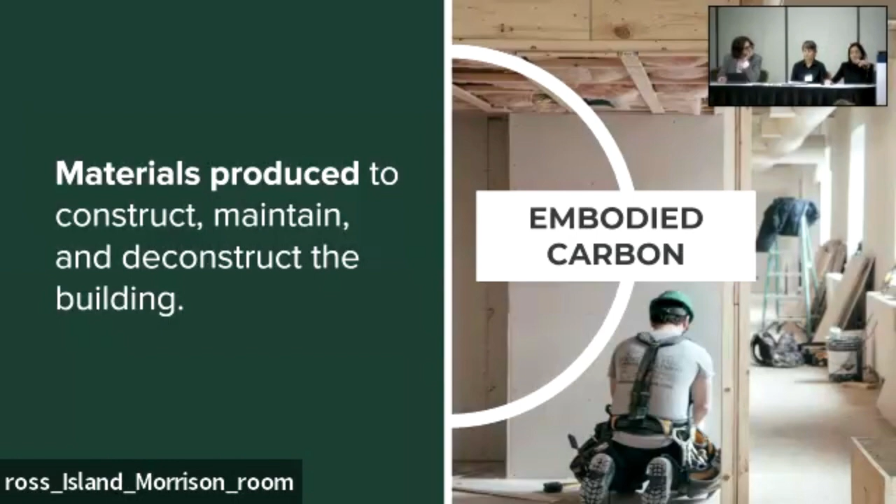Now, operational carbon is a very significant part of a building's footprint, but as I mentioned, the building industry has made some really incredible advances as it relates to things like energy efficiency and renewables. And as our buildings get more and more efficient over time, we're gonna start to see a shift where embodied carbon really becomes more and more critical. And so we really need to start thinking about this holistically and start taking into account the whole life carbon of our buildings.

So how do we do it? Up until this point, I've talked about what decarbonization is and why we need to do it, but really the essence of this session is how do we get there? So Rita, Nate, and I are going to present different frameworks for this, and I'm going to begin with a couple of frameworks for how to engage with decarbonization offered by the International Living Future Institute. And so we have zero energy and zero carbon certification that we manage, and both of these can be seen as a bit of a North Star in the green building industry for creating a decarbonized building.

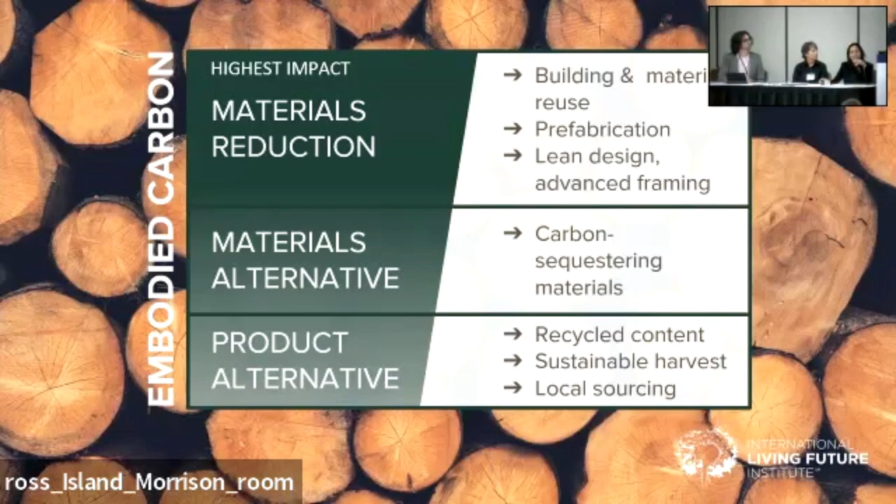I'm gonna skip over these few slides for the sake of time, but just wanted to share some of the zero energy certified programs that we've worked with. We have some in Washington, Austin. We have some single family homes in Moab, Utah that achieve zero energy. We have a really helpful financial case study up on our website for a project in Washington that's higher density affordable housing that pursued some of these goals. And we also have a couple of projects in our current affordable housing cohort that are actively pursuing zero carbon.

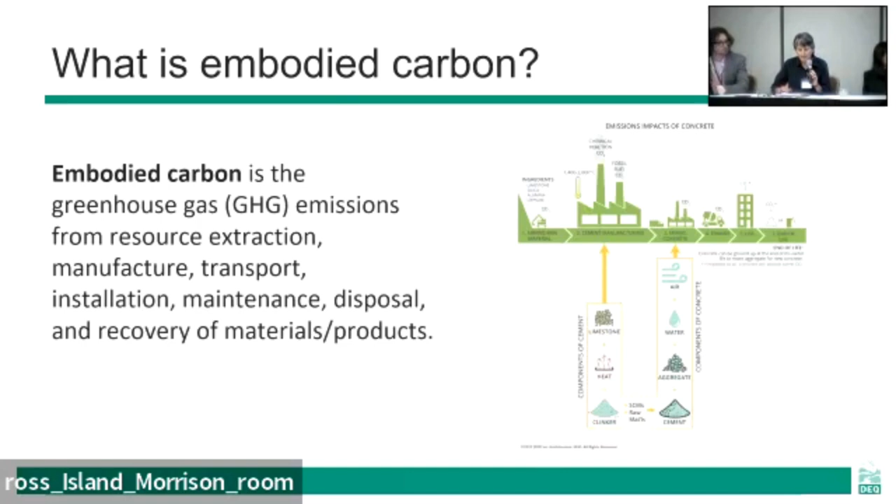When we take a life cycle perspective and think about not just cement, but all the materials that we use, again, the vast lion's share of those impacts are upstream in the manufacturing and to some extent the construction. So that's why we are focused heading upstream to reduce those impacts.

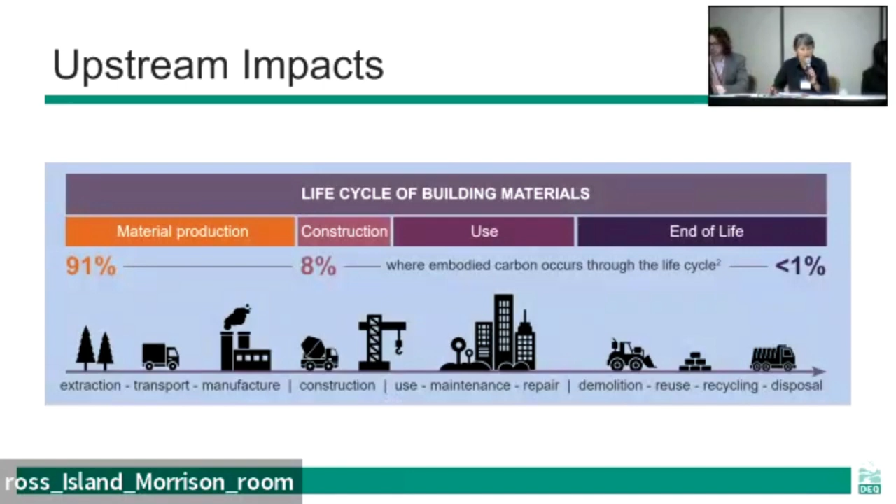When we think about the life cycle of a building, and we think about at what points and stages in the life of a building, what are those carbon impacts? What are those operational carbon impacts and the embodied carbon impacts? As Leah noted, right up front, we have a huge embodied carbon impact. Before we cut the ribbon for the grand opening, before anyone moves in, there is a huge embodied carbon impact.

We as an industry, as Leah noted, we've made tremendous strides in reducing the operational carbon, and a lot of that is due in part to codes getting more and more stringent. Over the last 50 years, a code built building generally has had the operational energy load knocked down by one half. It's really significant. When we pay attention, we can make some significant differences. Given our climate crisis and our understanding of materials, it's time for us to put more attention on the embodied carbon of our materials.

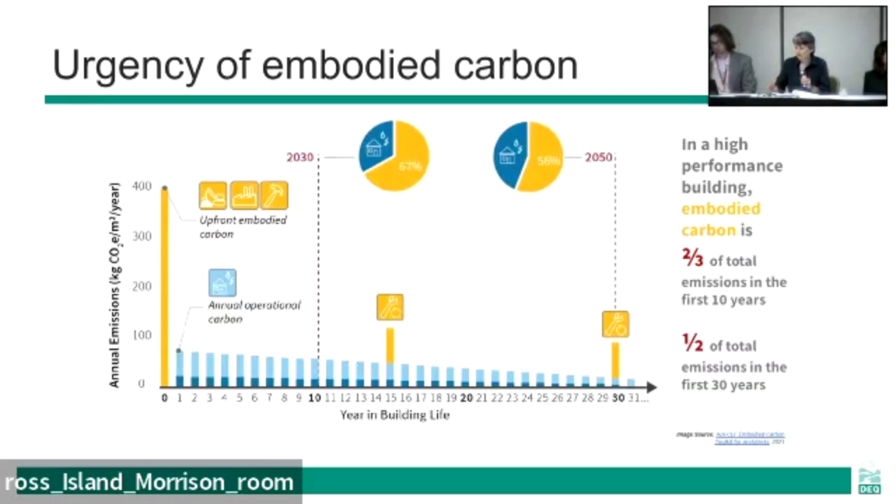So how do we measure embodied carbon? Well, we could geek out really, really fast here, but think of it as a super rigorous accounting methodology that looks at all the inputs, all the outputs, and the impacts. And this is a very standardized methodology that's based on a number of ISO standards.

The output or the reporting that comes out of a life cycle assessment, and believe me, you don't want to read the 150-page report, but you might want to take a look at the 5-page environmental product declaration. You'll often hear the term, just the code, EPDs. You'll hear EPDs all the time. Think of an EPD as kind of analogous to a nutritional label for food.

So if we have EPDs for our building products, we can compare the global warming potential of those products, or embodied carbon. Global warming potential and embodied carbon often are used interchangeably. So if we have labels for products, we can compare the embodied carbon of comparable products similarly to how we can compare the caloric impact of food that we're considering. So EPDs are an important part of the puzzle here in demystifying what we're using and how to make better choices.

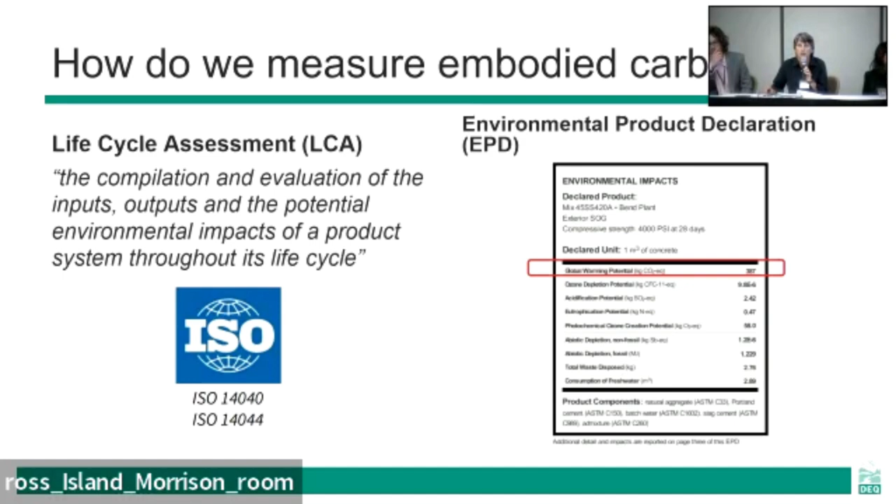So what are we doing about it? And how can we reduce the embodied carbon impact of the materials that we're using? Well, one thing is to make environmental product declarations for the products that we use more readily available.

This summer, Oregon DEQ, in partnership with the state of Washington and folks from the International Code Council, we were successful at securing a $3.5 million grant from US EPA to support manufacturers of building products serving Oregon and Washington so that they can produce EPDs, so they and we can better understand the impact of their materials. So we anticipate we'll be working with more than 200 manufacturers over the next 3 years, and anticipate that that'll result in at least 1,000 additional EPDs, again, to help inform our choices.

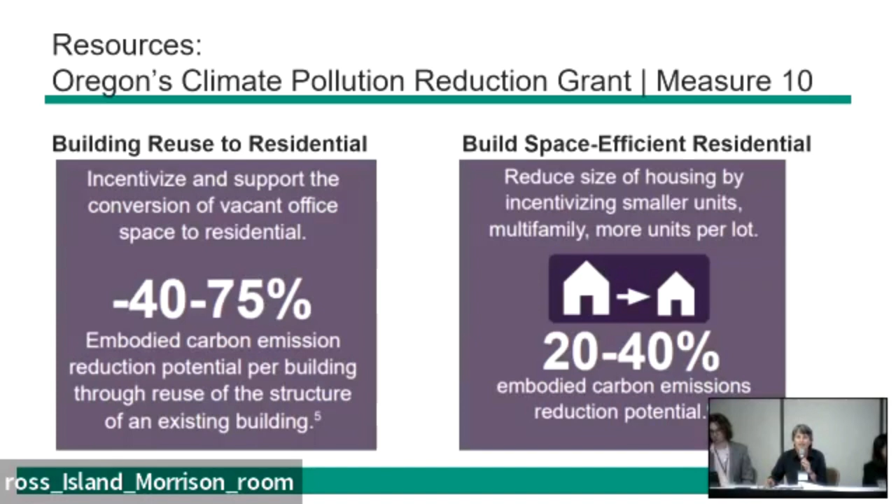Both of these strategies inherently are low carbon strategies because we're using less materials. And then space efficient housing offers that added benefit, as Leah mentioned. The smaller structures are going to take less energy to operate, heat, cool, ventilate. And another really interesting thing is if we have smaller spaces, people tend to buy less junk and fill up those spaces. And that's another piece of our climate puzzle, but that's a whole different topic.

And we also see great upside in terms of us being able to educate and inform a lot of project teams about what is embodied carbon, share resources, and do some interesting analyses and really understand the carbon impact and what else we could be doing going forward. Another piece of the grant is that we're requiring that funded projects demonstrate at least a 10% embodied carbon reduction in the materials that they use to build out those housing units.

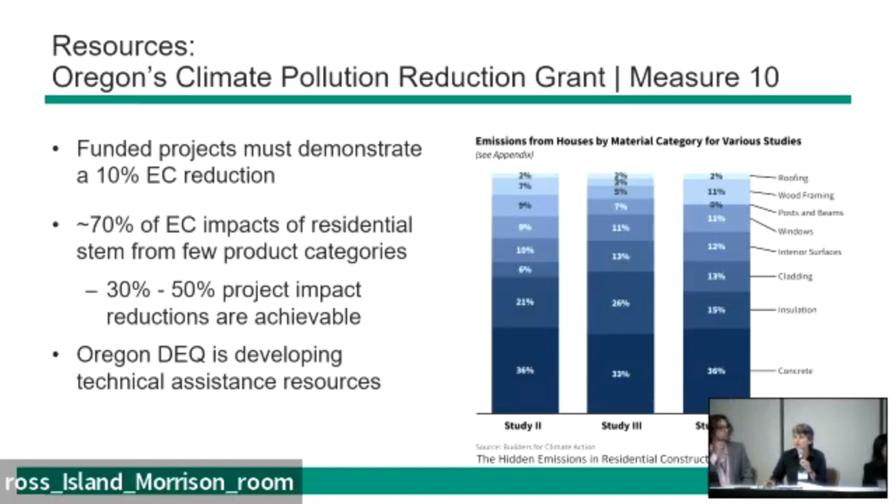sheetrock, and flooring. So Oregon DEQ is in the process now, and we're probably going to hire an outside contractor to help us with this, to put together a technical support package to support all these funded projects as well as everybody else. So that's in the works. Oops.

I'd like to call out just a couple of resources that you might find helpful if you're excited and interested to dive into embodied carbon. Your first stop should be the Carbon Leadership Forum. They are just providing top-notch, best-in-class research, resources, references, and trainings, and they're all free. So they are absolutely just an incredible resource.

I'd also like to note Architecture 2030. They've put together some really helpful and compelling and interesting resources to help us all better understand embodied carbon and where are those impacts, where do they take place, and what are they associated with in the building materials that we use on a regular basis. And as I noted, DEQ is in the process of putting together technical resources, which should be available by the middle of next year, maybe a little bit sooner.

Oregon DEQ is in good company as it pertains to embodied carbon initiatives and policies. The state of Oregon, state of Washington, state of California all have a number of embodied carbon initiatives that are at the state level as well as the local level. I do want to just call out one of these items in particular, the fourth one, Oregon Building Codes is currently in the process of exploring the possibility of including embodied carbon within building codes, as well as taking maybe a non-code perspective. They're considering both.

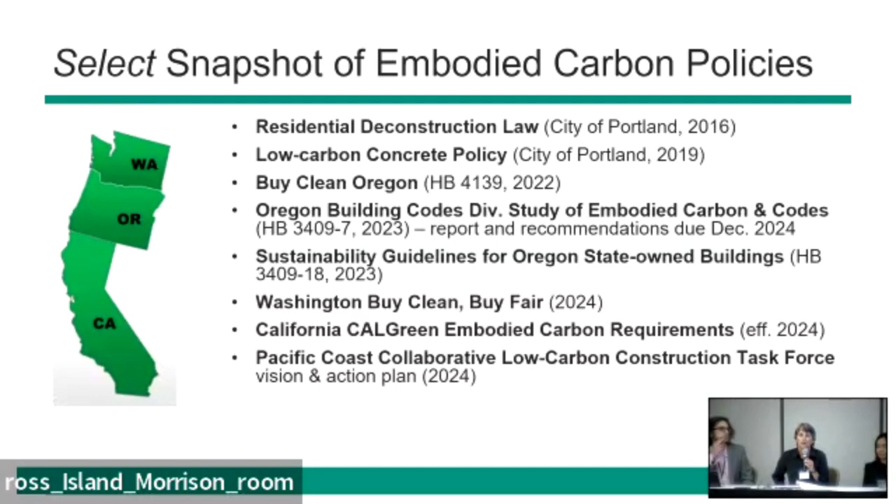They owe a report and recommendations to the Oregon State Legislature by the end of this year. We're really excited to see it. We've been collaborating with them, but it's their report, so they own it. We're nudging them, but we're excited to see what they produce and their recommendations, because we think that's going to set the stage for a lot of our work, our collective work, the big we, to come.

And just in closing, I'd just like to reiterate that embodied carbon is a big piece of our climate action puzzle. There's a lot of resources currently available that can be applied, carbon neutral. Some are even offering cost neutral. Some even offer cost savings. And I think those are just going to continue to grow as we all become more familiar and build our practice of addressing embodied carbon. Super important issue of our time.

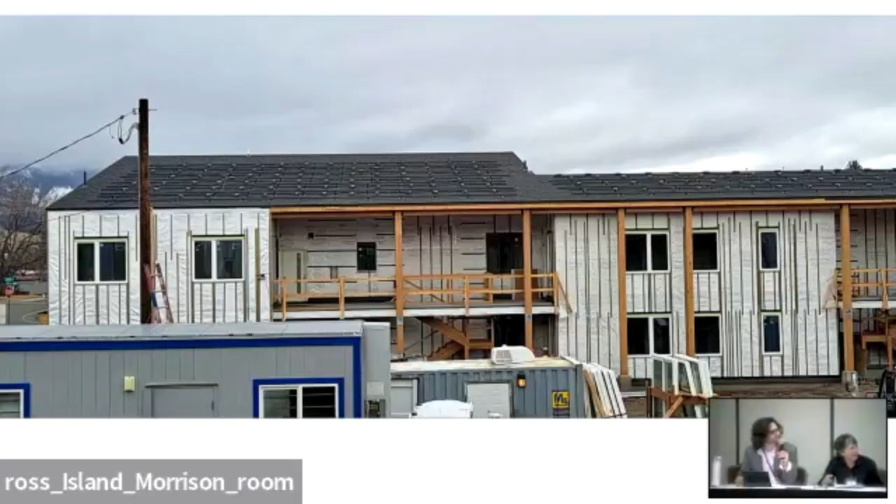So now your cheapest and most, yes, please. I'm terrible at clicking, apparently. So step one. Thank you. Thank you, Rita.

So, the lowest cost, highest impact is to maximize solar first. And especially because this is a project that had a lot of roof area, because it's 2 to 3 stories. We just said, okay, let's orient all of our roofs and just maximize that, because there's solar energy tax credits. The folks we partnered with at Fleet Development did a fantastic job of helping the project take advantage of those. A lot of projects in Oregon are in ETO territory, who has a lot of incentives, which is great.

This project was not, so we didn't have direct utility incentives, so we had to get extra creative. It was an independent co-op utility, so they didn't have some of the grants that you can get through PGE or Pacific Power. So we had to leverage a lot of things, and that's what it takes, is finding all of the different avenues that you can try to leverage.

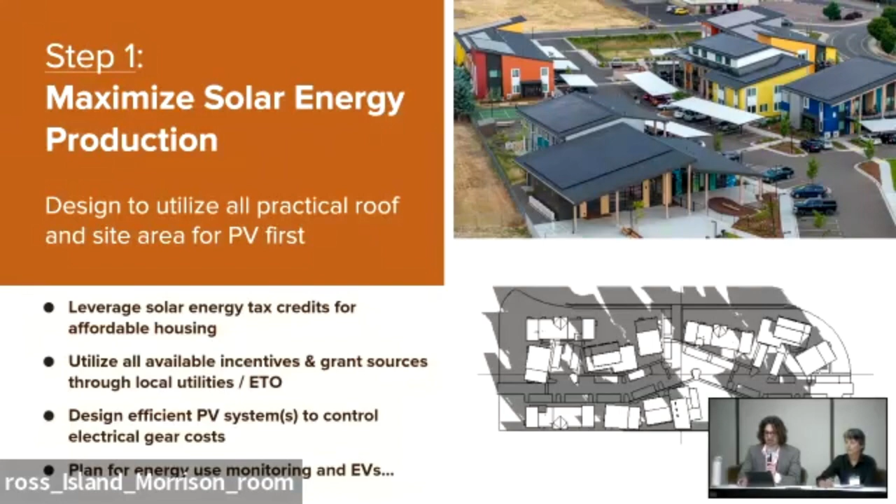And then you want to keep your systems as efficient as possible. In this case, we also had really complex limitations to stay within like 25 kilowatts per meter panel, and it was just a whole lot to juggle. And then planning for energy monitoring, EVs, all the different things that come into that. We definitely utilized every bit of roof area on this project, except we didn't need to use the carports, which were a required thing. We thought we might have even more solar there, but it's a little more expensive.

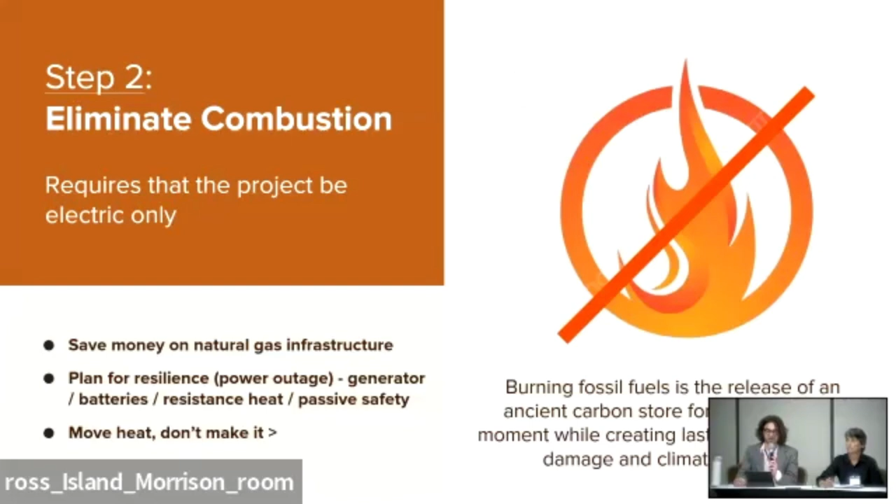Step 2, as Leah spoke to, you want to have zero combustion when you're trying to reduce carbon and eliminate emissions. So we had no natural gas infrastructure and planned for everything to use heat pumps. The idea is to move heat around, not make it, right? Because if you burn something, you emit carbon, and it's one instance of a moment, and a lot of impact long term. So try to avoid that.

Here's just an overview image of the site with all the buildings and solar. And then step 3, like I was alluding to, you want to utilize heat pumps as much as possible, because what those do is use a little bit of electricity to move heat that already exists in the atmosphere to where you need it, whether it's into your hot water, into drying your clothes, into heating your space, or cooling your space.

So that's what those do. And it's a very cost-effective and kind of multi-benefit strategy, because you also want to couple that with good ventilation with heat recovery. So that improves indoor air quality, it improves occupant comfort.

And of course, as we're housing more and more vulnerable populations, climate is changing. It's really important. And it's also really important to make sure there's resilience built into your systems, so that if you have a power outage or extreme conditions, you are keeping people as safe and reasonably comfortable as you can.

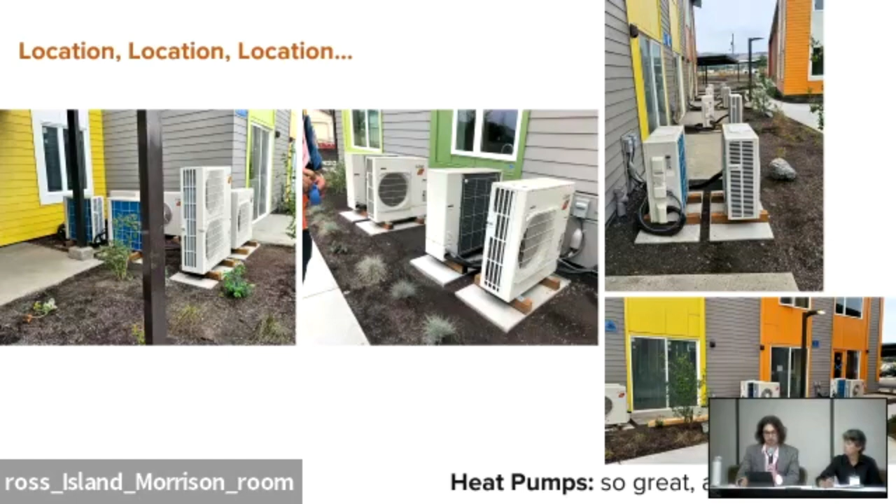So in our case, we utilized ducted mini split heat pumps that were in the ceiling in each unit. And those were coupled with the ERVs. We also had heat pump clothes dryers, which save a lot of energy from standard vented dryers. We had heat pump water heaters. Most of them were the individual type, so one in each unit.

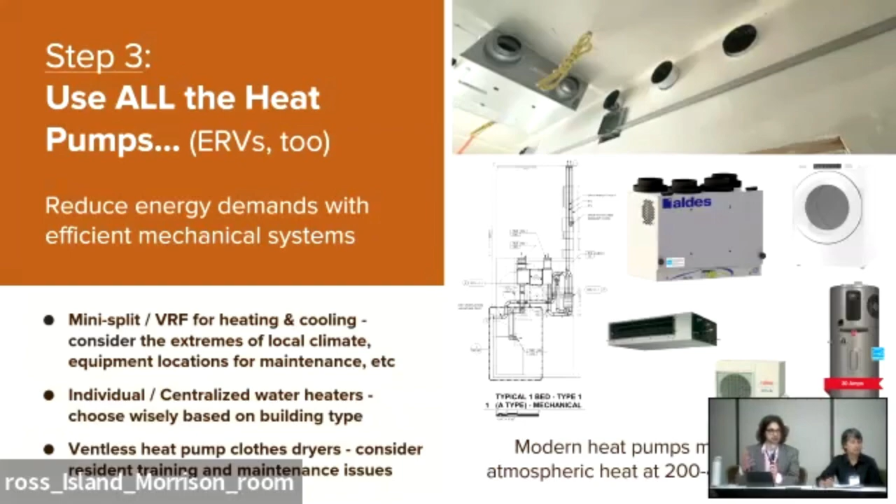And I can talk later, maybe if there's time, about that, because we also got a grant from BPA to look at a centralized system in one of the buildings. This project was interesting because the scale of the buildings was not quite ideal for centralized hot water, but we still wanted to study a different kind of heat pump in a centralized application compared to the individual ones. So we're looking forward to more data around that.

And then these heat pumps also have outdoor units, these little compressors that you've probably seen if you have air conditioning at your house. These little guys involve a lot of coordination, they take up space. They get in the way, especially on a tight site like this where we're trying to do it cost effectively. We studied lots of different ways to mount these things and ended up back with a pretty basic mounted on the ground situation. But you can see that there's lots of little hoses and lines to consider. And this project was in a snowy climate, so there's stuff around snow and ice that has to be considered.

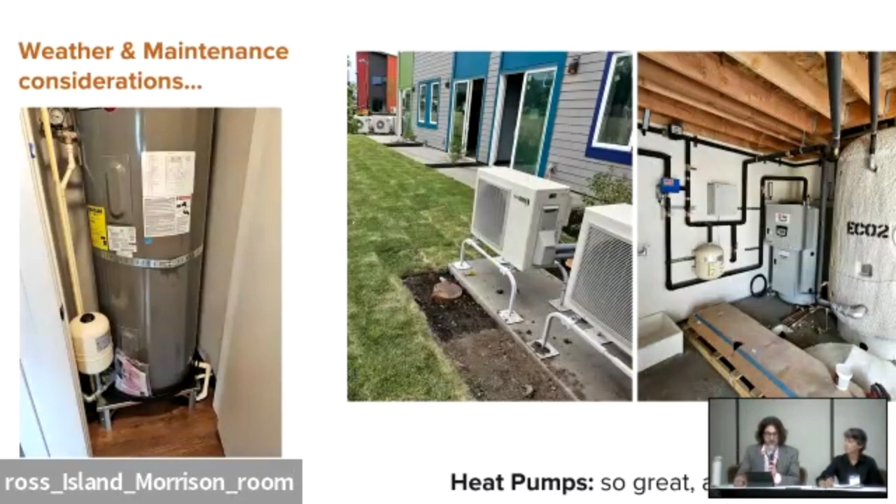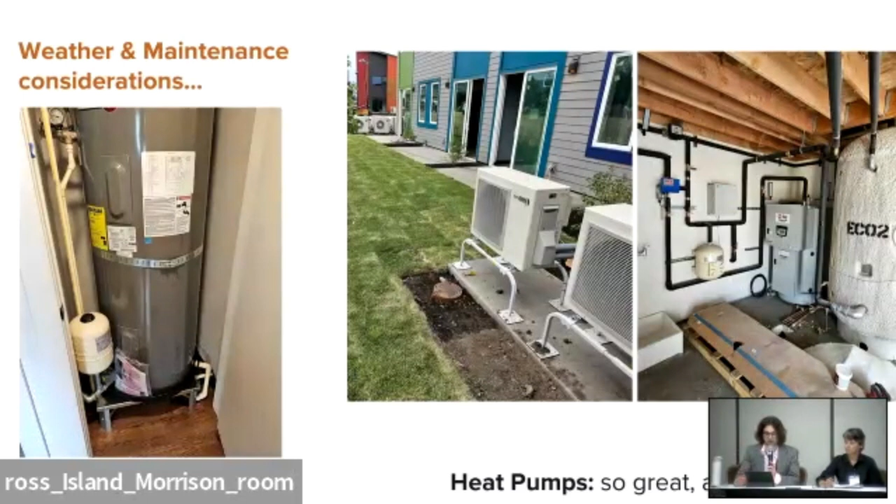On the hot water side, there's the maintenance concerns of making sure you're controlling temperature and freezing conditions. We had a lot of go-arounds on both types of water heating, so there's a lot of considerations to take into account when using these systems. But there's more and more support, more and more research going into them. They're getting more common, so there's a lot of good resources there.

And then step 4 is to make the building enclosure as efficient as possible. This turns out to be one of the more expensive upfront costs, but long-term might actually be the most cost-effective and resilient way to go. So there's always going to be a balance between your first cost and your long-term maintenance costs, because all those systems I just talked about have long-term maintenance costs and replacement costs that are significant. And so the more you can make sure that the building doesn't leak or lose energy, the more you're taking that out of the equation. You're making a more durable and resilient building all around.

So in our case, the most cost-effective things were around limiting air leakage. That turned out to be a challenge for sure, especially because this project was in a rural area, where there's not a lot of subcontractors who are used to high performance building. So the conventional methods of air sealing were tough to accomplish, but thankfully there's a technology called AeroBarrier that we used, which sprays sealant into the air, and then it finds all the little cracks and crevices, and that was super effective.

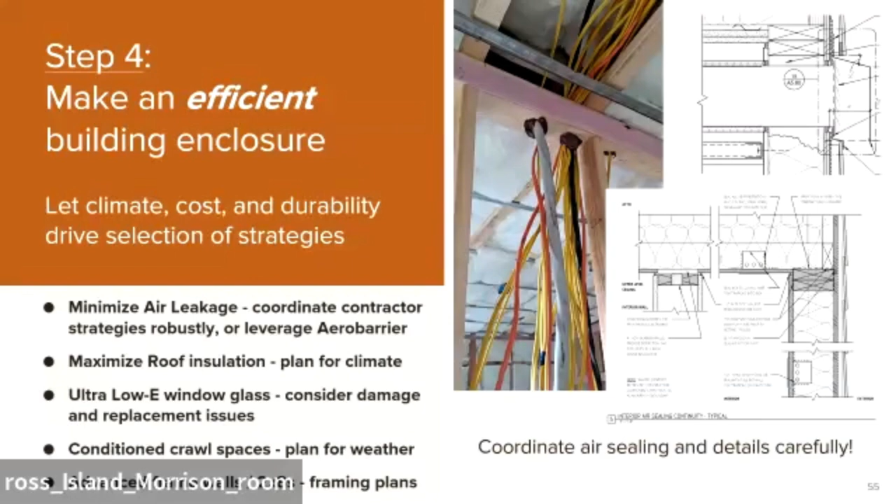And then all of these kind of details take a lot of coordination to make sure that it's happening, that things are being well sealed, the insulation's going in really effectively. Oftentimes it's not. In this case, the mock-ups and initial stuff we went over with the contractor looked really great. And then over time, you sometimes get to see different results. So it takes a lot of coordination, a lot of constantly communicating and making sure that that follow

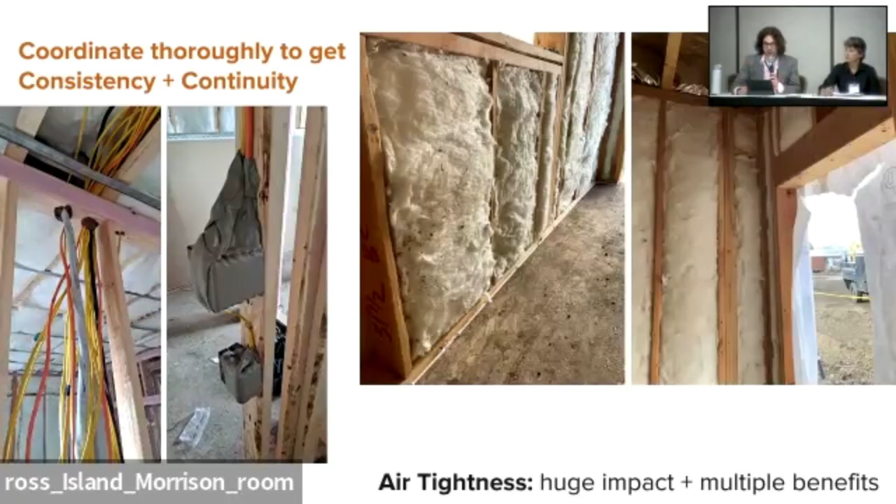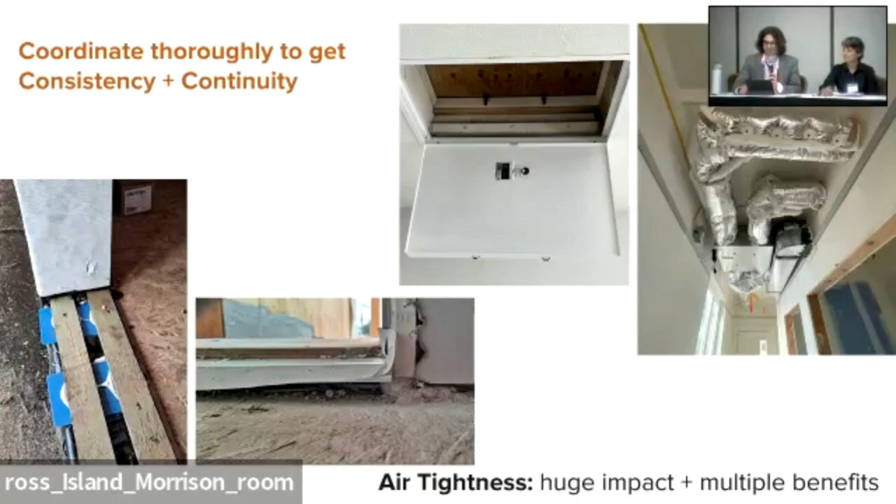through is happening. And some of the key details we found for air leakage were things like the pre-hung entry doors, attic hatches. We had a detail that really tried to seal up those openings, even just little sprinkler heads through the ceiling, all the little ducts and how they move through. We actually had a lot more air leakage even within the envelope of the dwelling units than we thought. So air finds its way. So there's a lot to do there.

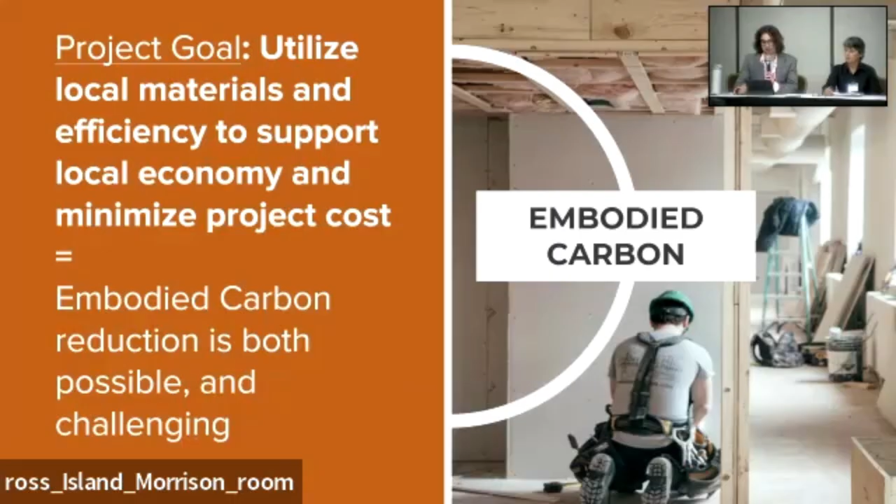And then the other part that Leah was talking to is embodied carbon. And although this project didn't have a specific motivator around reducing embodied carbon, it had goals around using local materials, maximizing material efficiency, reducing the amount of waste, and all of those goals about local economy help to lead towards lower impact materials. And so we definitely used some of that thinking to try to get to a better result.

And so we reduced concrete wherever possible, used it very minimally for foundations only. Reduce the wood framing, as I was saying, through advanced framing, and then reduce the amount of finishes that you have to apply wherever you can, because those are just extra materials, right, that have to get replaced. And obviously flooring is a big one that is never an easy answer in affordable housing, because you need that durability. You also need to be able to update and replace it, but it has a lot of embodied energy. And so that's a big struggle for the industry that everybody's working on now, which is awesome.

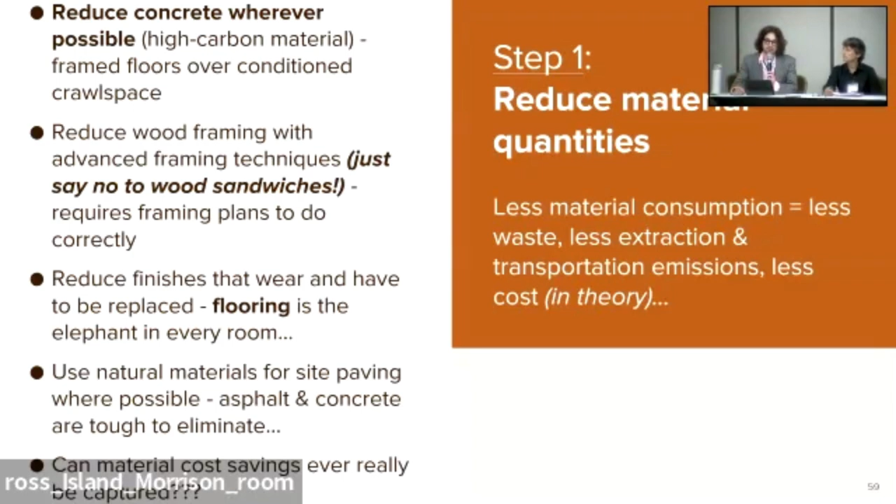And then just utilize natural materials where you can to offset site paving, like asphalt and concrete, though it's really hard to get rid of some of that in the day and age we live in. And then there's the struggle too: the more you strive to design for a really efficient use of materials, we don't always get to capture those cost savings. And there's industry reasons for that, but a lot of it is just subcontractors charge by the square foot in general, and they don't really look that closely and sharpen the pencil. And it's just a tough situation that we have, and that's another deep dive we could go into, but don't have time right now.

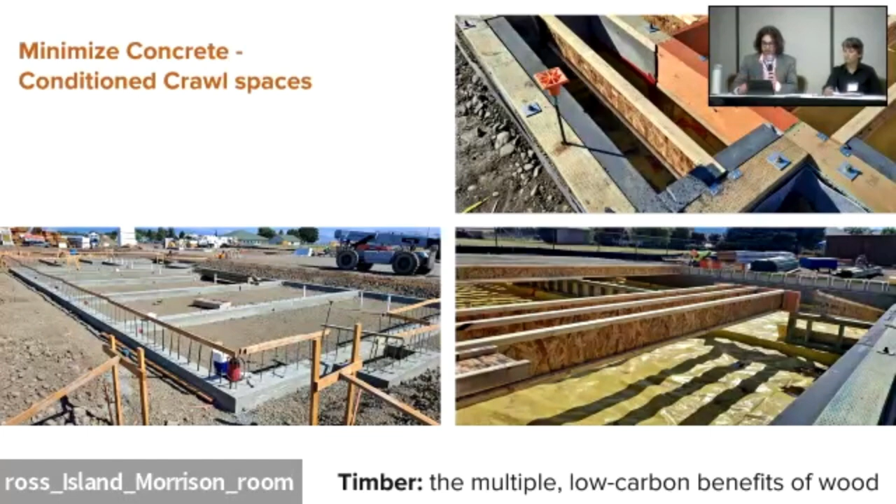So an example of reducing concrete here is you see just the minimal foundation walls, and then everything that could be wood framed was, even though these have to be an accessible ground floor where you've got to have that floor aligned with the floor outside for accessibility reasons. That makes it tough to do a crawl space typically, but we used insulated conditioned crawl spaces to achieve that and not have to vent the crawl spaces, which also improves energy efficiency. And instead of having a concrete slab on grade, now you have a wood floor to reduce that embodied energy.

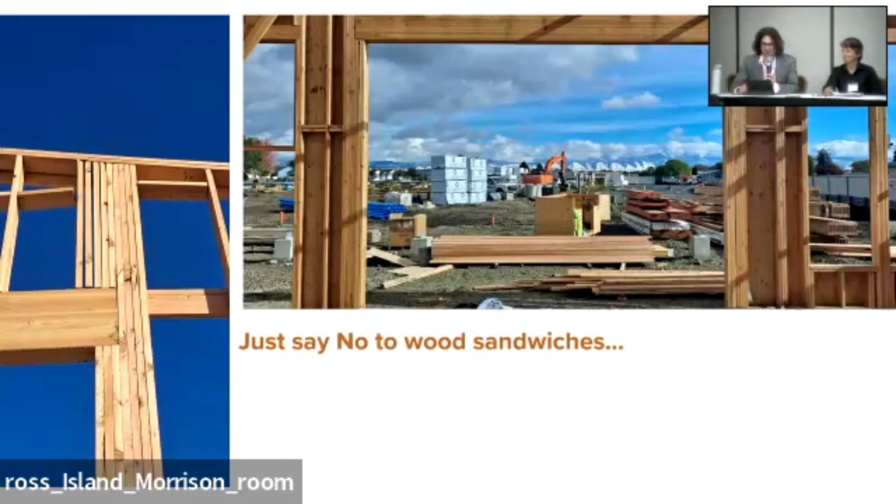We did have goals for advanced framing, though in a few cases we had what we love to call wood sandwiches, which I don't recommend. So the only way we've really found to get around that is to get in the weeds and do framing plans that really illustrate to folks who aren't used to efficient framing exactly how to do it. So that takes a little more effort than usual, but this is an example here where early in the project, they weren't actually following the advanced framing.

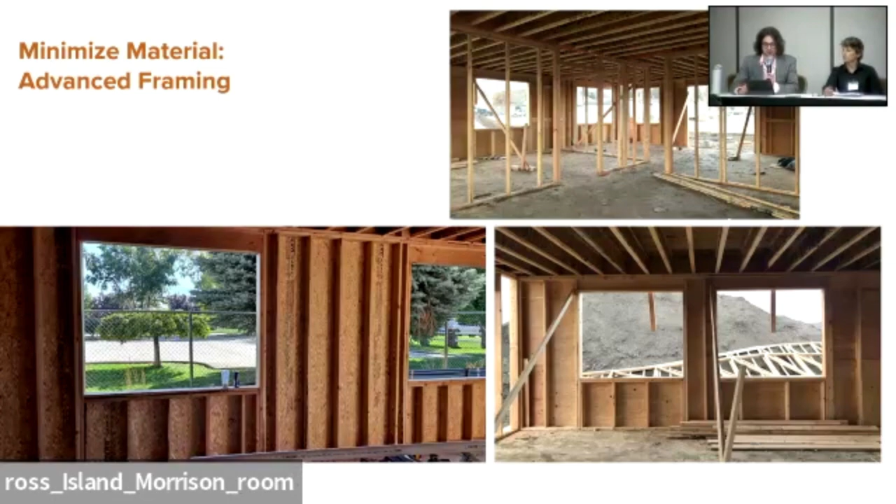So that's the image on the bottom left. And then you can start to tell on the right-hand images that there's a little bit less wood there in the walls specifically. And that helps both thermally and just reducing the amount of materials you have. We also tried to lay the site out to be as efficient as possible. So concrete and asphalt only where you have to have it for parking and getting in and out, and trying to eliminate it everywhere else.

And yeah, then on the interior finishes, really just trying to keep things as minimalist as possible. We actually utilized ILFI resources and health product declarations and EPDs to select the flooring, to try to find the best option we could. So those things are always super useful to us when designing.

And in the community building, we used the slab on grade as the finished material. It's super durable and robust, and looks really nice for that kind of community space. And then the ceiling and the roof trusses were all just left exposed, just trying to utilize as much of that as possible. And the whole project really is wood framed, right? So the more we can just use wood, and it can be as regional as possible, is always the goal.

So then choosing those low emission materials, which I already spoke to a bit. We did strive to use low carbon concrete, but that proved to be really difficult in the rural market. We leveraged some of the resources out there, but between budget constraints and time constraints, it just didn't happen. It's a tough one to implement, but there's a lot of potential there to reduce carbon in the concrete you're using.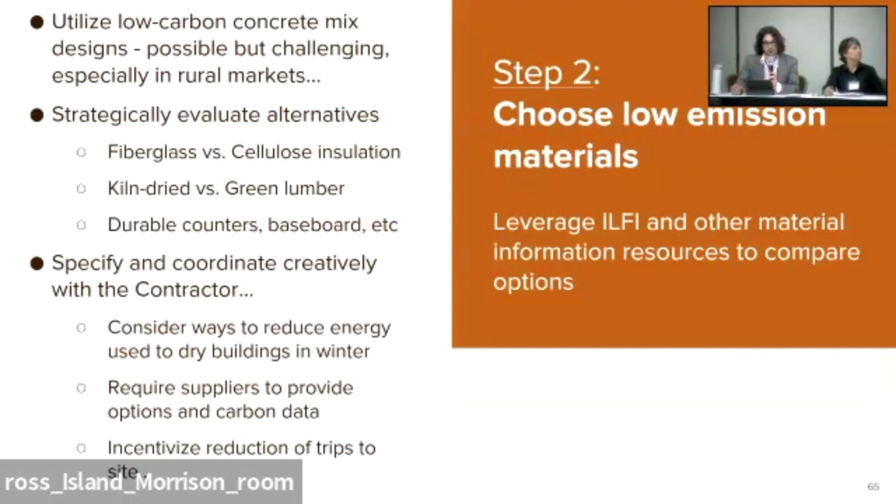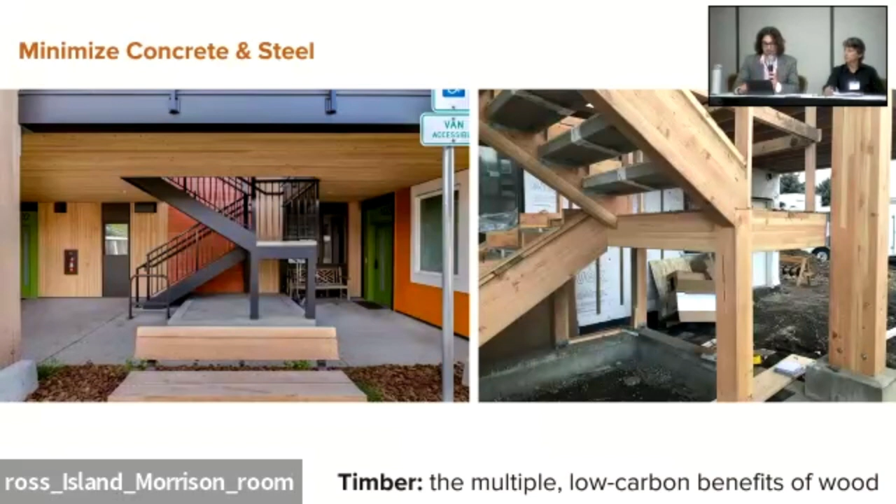And minimizing concrete and steel, as was mentioned earlier. So building everything out of wood that you can. We did that with stairs, just having concrete for that finished walk surface where it really has to last. Even just the trash enclosures, building those things out of wood and keeping them as minimalist as possible.

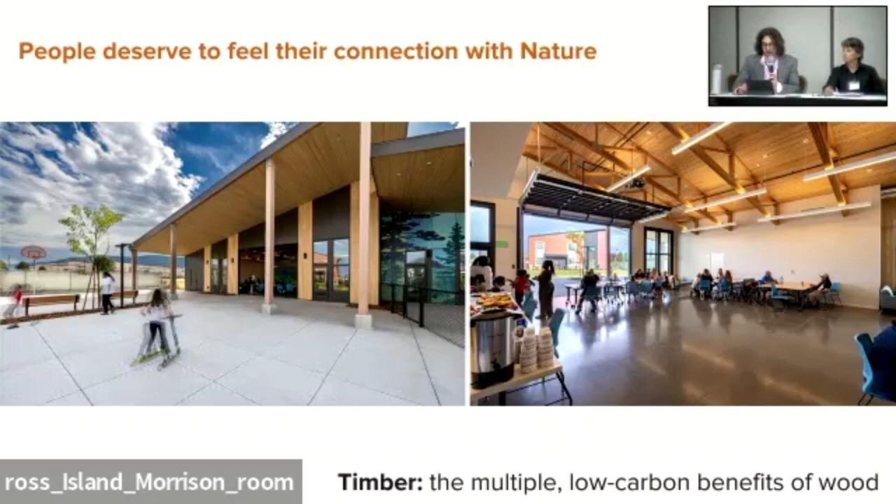And really, people deserve to feel their connection with nature. So utilizing wood wherever you can has so many benefits, psychological, aesthetic, as well as all these ecological benefits. So just try to celebrate that here in the Northwest. These are just some examples of how we tried to do that with siting and really make the aesthetics of the building tie into these ideas.

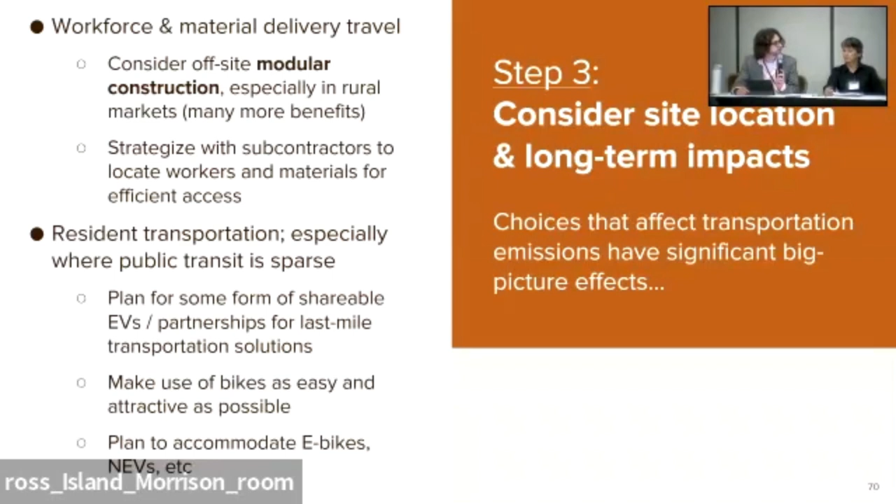And then the last step there is considering the site location and long-term impacts of what it's going to be like, especially for folks living there, right? In this rural area, people are going to be driving a lot. So is there anything that can be done to incentivize people to use shared EVs, or hopefully more and more people will use electric bikes because it makes it so easy to get around, even if you've got to go a ways. So just trying to figure out how much of that infrastructure you can provide for, and really offset that ongoing carbon impact of living in a particular place.

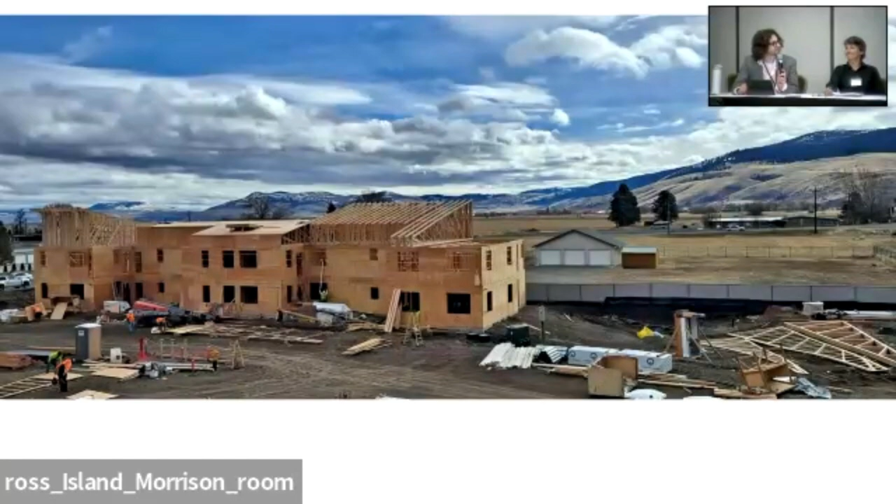And then there's just a few images of the project under construction, just to give you a feel for it, and the gorgeous setting that we had in the mountains out there. And yeah, so that's basically the overview of Timber Ridge and our approach. And we're definitely open to any questions y'all might have.

Thank you. I'm going to step right in the middle of it here. Your timber, are you talking mass timber here? This is all kind of conventional wood framing and timber, if you will. There is some heavy timber, so these larger columns and beams you're seeing, but it's not mass timber in terms of the trendy thing of mass timber, which, yeah, and so that's a really good

thing to point out: mass timber is a fantastic replacement for concrete, which is necessary for really large buildings, high rises and such. That's where it really shines as a material. It's actually not necessary, and it has more wood than is needed in smaller residential construction. So anything five stories and below can all still be conventional light wood framing, and you'll use less material and less embodied carbon. So it's a good distinction.